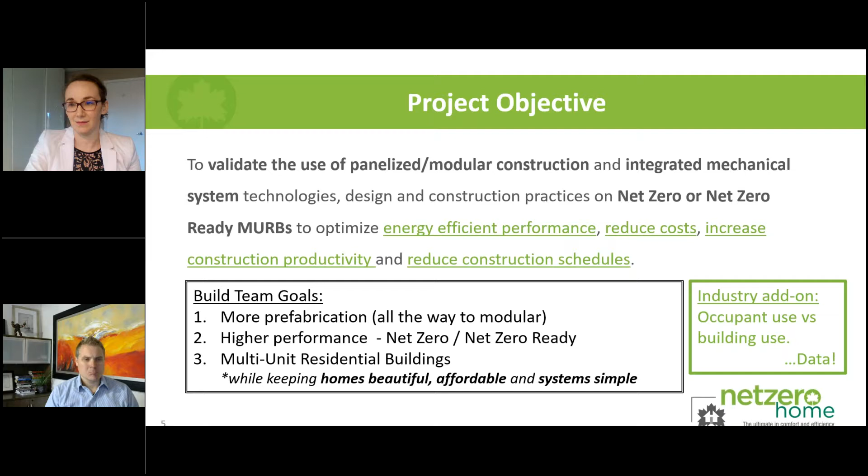So this project is across 4 provinces and 3 climate zones, and has both rental and ownership models. So we have condos and we have some purpose-built rentals, and rentals sometimes for outside organizations. There are about 100 units in total that are going to be getting energy monitoring out of this.

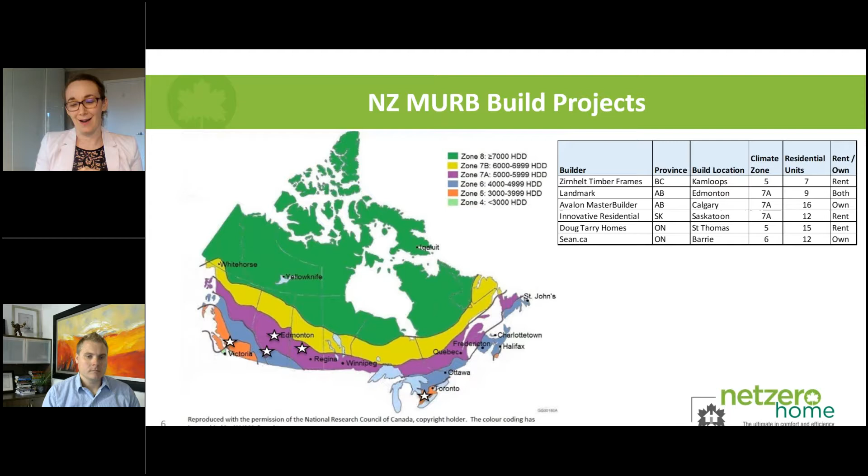Both of the net zero MURB buildings as well as some of their sister buildings. Often we're seeing builders build two of almost the exact same products side by side. One would be net zero and one would not fall under the label. We're going to get monitoring information for both to compare and have a really rich data set at the end. Also, we're seeing these builders cross from urban to suburban and rural, so it's going to be a really valuable set of information and learnings at the end.

This is a long-term project. We kicked off last year, so we're in year 2. Last year we were focusing on planning, designing, and getting the approvals. At this point, we've launched with some manufacturing and construction, so prefab manufacturing and construction on site. We're hoping to get our first units labeled later in this NRCan year, because this is an NRCan funded project.

And I'm looking forward to doing that with Alex Miller from the Big Block Construction team. Beyond that, we're going to be looking back at our lessons learned that we're collecting through all of our templates and sharing on a regular basis, and then share that information more broadly through a series of presentations and reports. We'll also have here at the end 5 years of post-project data collection on the energy performance of these units.

So we've done our designs for project builds. We've got a customized net zero MURB label that we're piloting with specific air tightness testing protocols that would recognize that attached units have different air leakage concerns from single family homes. We have our monitoring equipment and plans in place.

We've been looking at net metering and sub-metering policies and cost analysis review. So that one being the idea that if you have a single PV array for a 10-unit MURB, that is less expensive than 10 individual arrays and 10 points of connection with the utility. We're hoping to dig into this further with the 6 examples that we have, but have some regulatory policy challenges with this. We've also been working on how we're marketing net zero MURBs.

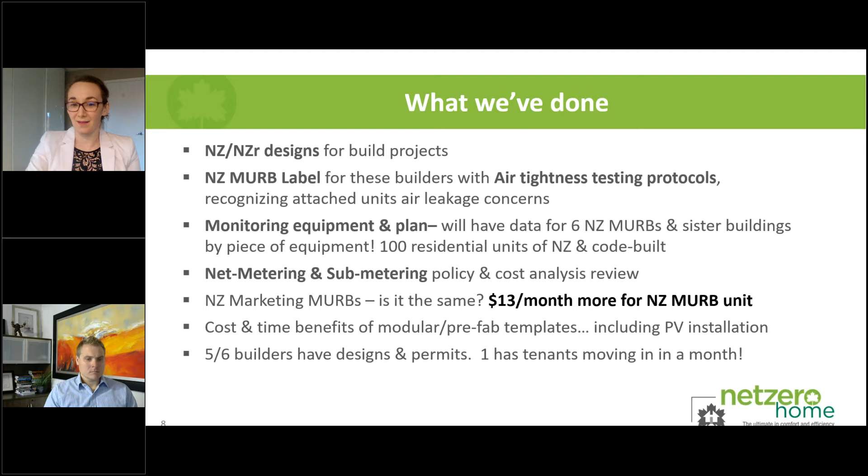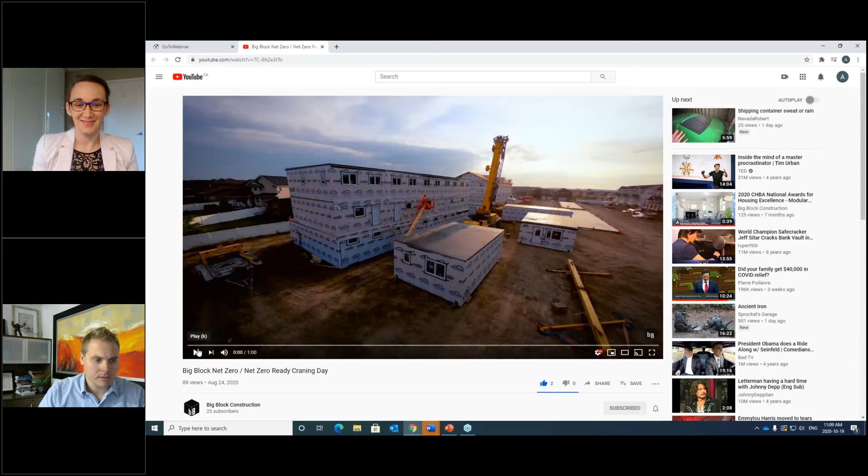Yes, we can. Okay, so this is something that we did here. This was our craning of our net zero building in the 3rd week of August. So I'll just start with this, and then I'll walk through it a bit more.

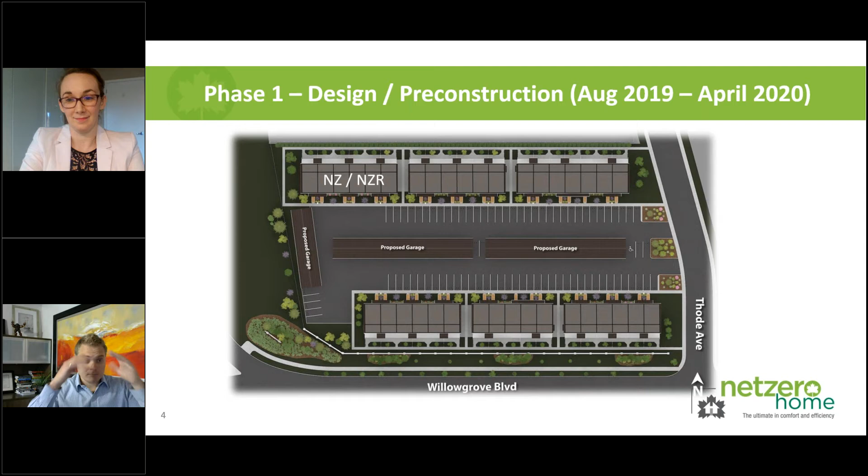As an engineer, I really love this thought process of being able to analyze multiple things with less variables changing. So real quick background on the layout: we have a 3-bedroom, 2-story on top of a 2-bedroom single-story.

In the interest of time, I won't walk through it fully, but this blue line here is kind of grade, so you have a little bit of walk up on the front and a 2-story walk out at the back.

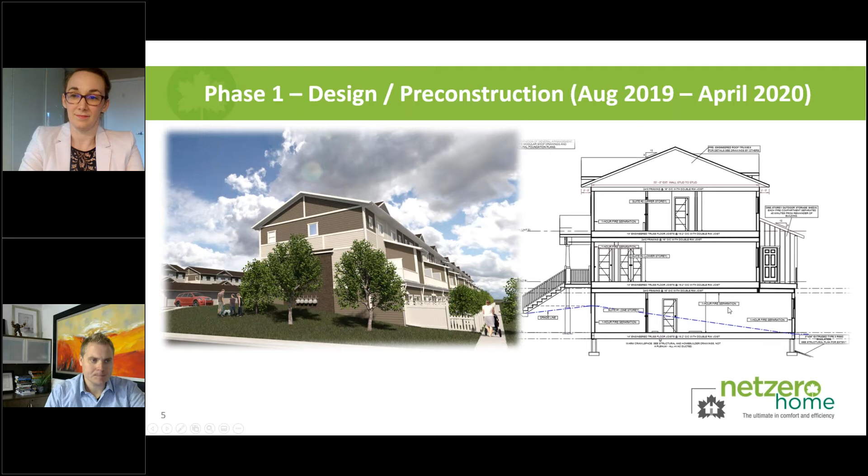So phase one, there was a ton of stuff that went through this, but in the sake of time, the design charrettes we went through and the building project analysis gave us a lot to think about.

The routine builder meetings, I can't thank enough, and if I'm committing to saying names I'll forget someone, but Sam, Chris, Haitao, Sean, Greg, Doug - I couldn't ask for a better group of builders to work with, being as open, honest, and transparent, and working towards our common challenges to get to this.

A huge thank you to CHBA for creating the environment in which we can all help each other. So super excited for that, and it's been a privilege.

So we went through a ton of different design requirements, product comparisons, and selections.

COVID happened and threw a bit of a wrench, but not a big one, because - and I could talk for an hour on why COVID didn't really throw a wrench into the modular component - that's a big kudos to Grandeur and any modular builders, for the controlled facility aspect and how it relates to COVID.

The one unfortunate part is because of COVID, we didn't get that pre-construction meeting like we wanted on site or in the factory. We still did pre-construction meetings, and I think it went really well considering. But yeah, I'm excited for us to be able to come back to that.

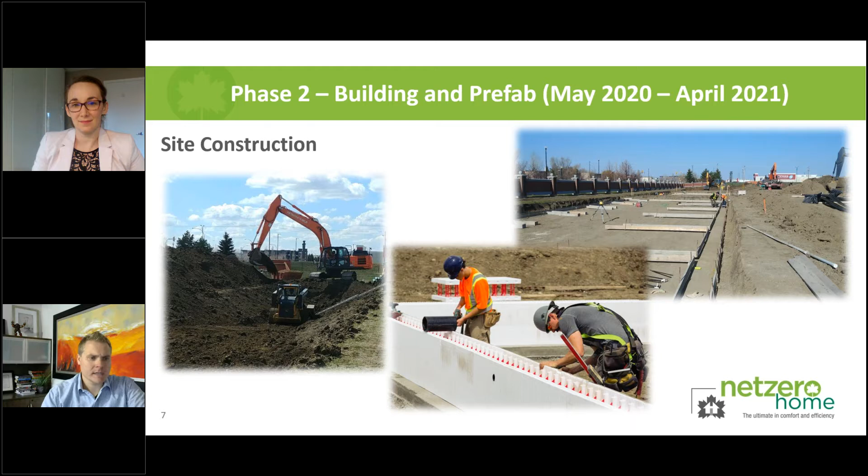A couple more site construction pictures here - sorry, these are high-res photos and now I've lost my mouse. Here we go, finishing those crawl spaces, getting them a little more ready for craning.

We did, like I talked about, a bit of building the grade up on the front of those units, as well as getting all of our utilities installed - SaskPower, Sask Energy - and any hard landscaping we could do prior to craning.

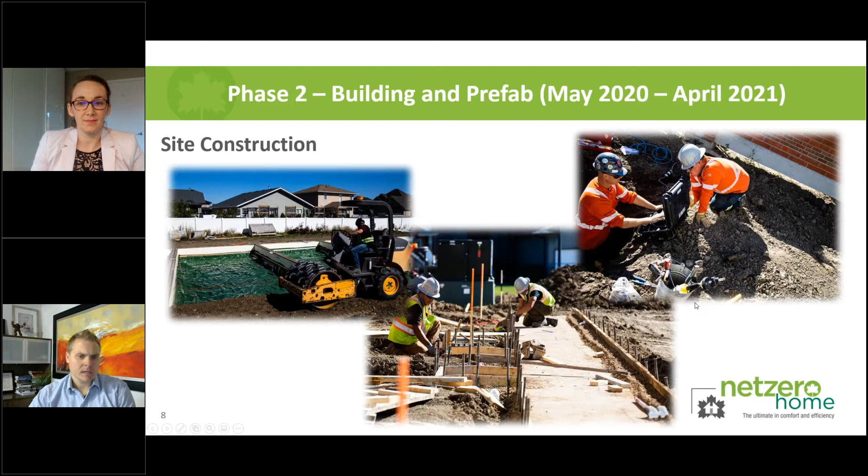And then of course, I'm really not going to do justice here for how awesome the modular component worked. We've got tons of videos, and so does Grandeur and other companies, on what it actually is, but I think you're all kind of familiar with what modular can be.

What we particularly did on this project, we actually did a 2x10 wall with a 2x6 exterior and 2x4 interior plates. That really worked well to get us the energy efficiency we needed, also from an on-site perspective of being able to finish it.

We've done full wrap EIFS systems before, but given the design and nature of this particular project, this is what we chose to go with. We've never done a double wall before, so that was new to us. The windows were Burdick manufactured.

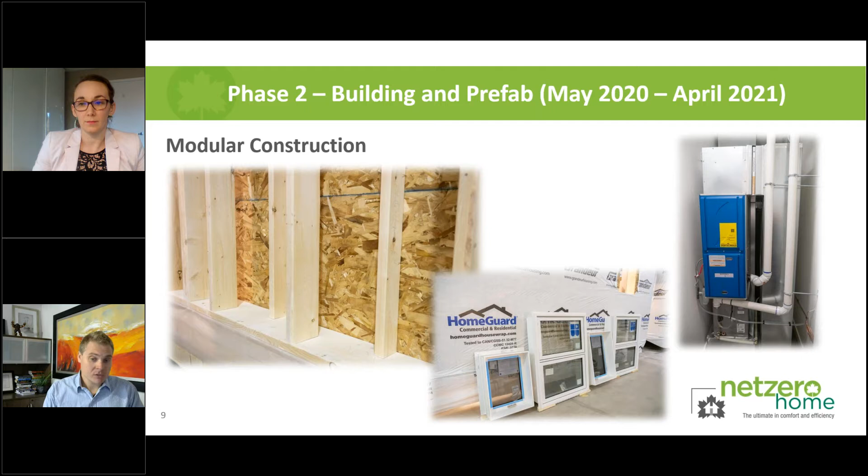They're triple pane, double low-E, argon filled, standard. That was our base, we didn't have to change anything on that. Really good windows. Something new to us was this dual furnace, natural gas, Chinook brand, but it's a dual furnace with an air source heat pump. That was new to us, going through the design and understanding how it actually works. Fascinating technology. Of course, you have your typical HRVs and ERVs.

Another thing new to us was the air source heat pump domestic hot water with backup electric heat. This was really fascinating for me as we were going through the design, understanding its place - where does electricity have its place? In our particular case, we don't have a lot of hydro in Saskatoon, in fact I think we have zero. Our costs are 5 to 1, not including maybe the carbon pricing that's come into effect over the years, so I'm really trying to understand the balance of where all these things fit.

Plus, all of our electricity actually comes from burning natural gas at our local power plant. So to think that gas doesn't have a home, I think is a little bit short-sighted. But anyway, we did end up going with no gas on this water heater - it was an air source heat pump. So that was new to us, and going through it was really interesting.

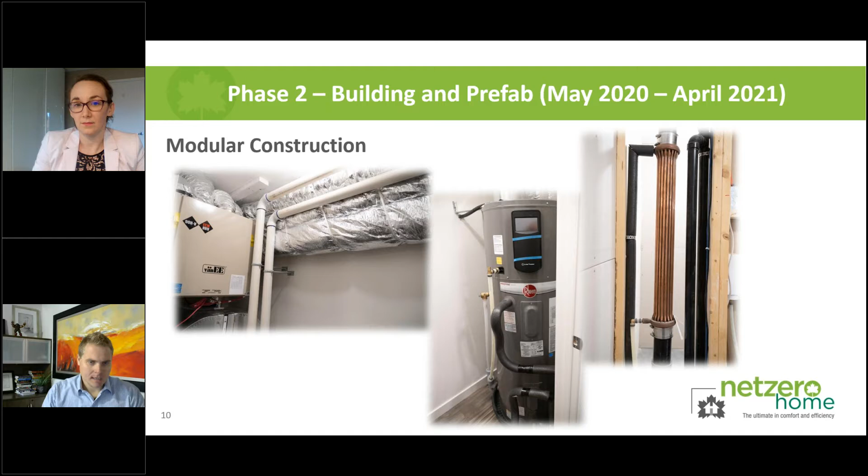As well as the drain water heat recovery, which again, we've never done. A couple finished pictures of what some of these homes look like - they're a rental base, so these were the specs. I think you guys are all familiar with what modular can look like. And then of course, some more pictures of us here on site putting it all together.

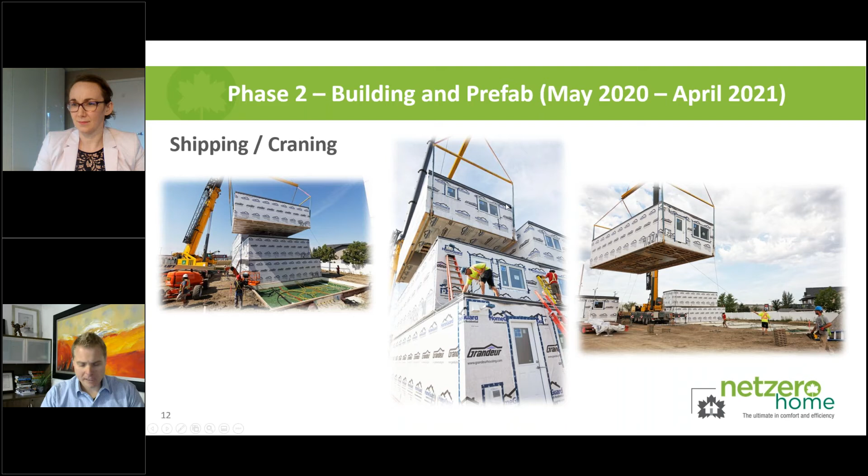Quality assurance program - I can spend a real quick minute talking about this. This is really neat actually. The Saskatchewan New Home Warranty program came out with this new value offering this year. It's a quality assurance program, and basically in Saskatchewan, from a high ratio leverage point of view, you have to have insurance, a new home warranty for the banks. But what's unfortunate is through the entire building process there is no exterior inspection requirement, which could be because of our location in Canada and the amount of rainfall and our climate.

However, that's one thing I think is really, really important - it's the first line of defense for these buildings as a whole, and it really aligns itself with net zero being as airtight as possible. You do the airtightness from an energy perspective, but you also like to do it from a quality perspective. So we were super happy to join John, the CEO of the Saskatchewan New Home Warranty, with Keith Hansen from Sunridge, group of builders. The relationship and knowledge these guys have, as well as Keith, Dave and Darcy, the entire team at Sunridge doing the energy analysis on our building, have been fantastic to work with, and a really, really cool opportunity.

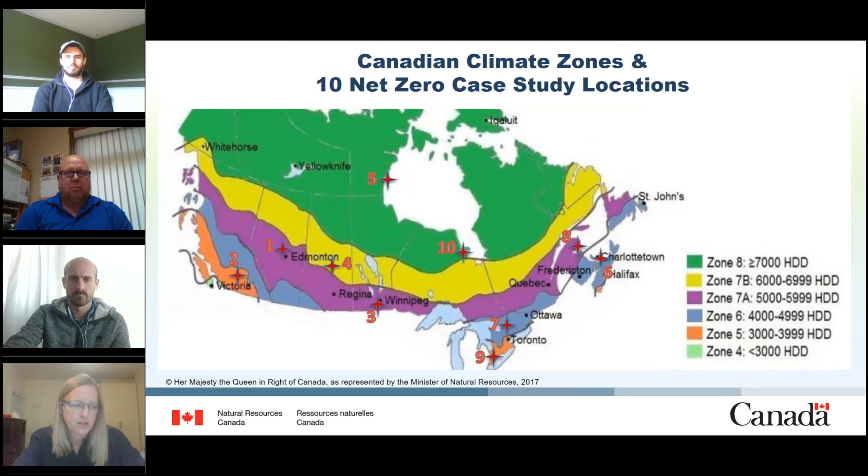So the focus story today is case study number 3. The builder is Grandeur Homes, located in Winkler, Manitoba, which is in climate zone 7A. It was a 2-bed, 2-bath, 1475 square foot bungalow, built as 1-piece modular construction with a site-built porch and attached double garage, and it has a full insulated 8-foot basement.

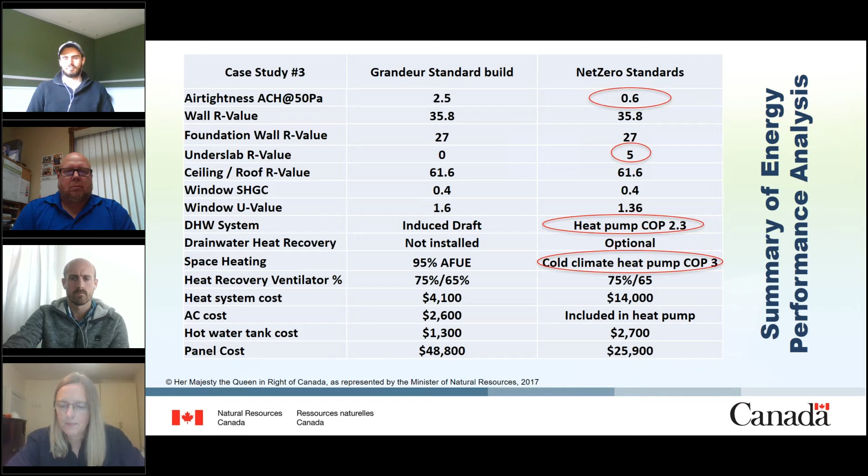This shows a very quick summary of the energy performance analysis. We began by looking at the plans for the modular home provided by the builders, then analyzed them and identified shortfalls and the best options to reach net zero performance. For this particular home, we had to look at the air tightness, add under slab insulation, and look closely at the mechanicals for opportunities for upgrade.

So a summary of the study results for case study number 3: the envelope energy performance was excellent. There really was no change needed in terms of R value, but we did discuss air vapor barriers and insulation strategies, and we shared the LEEP wall system packages, which are available to all of you who are interested.

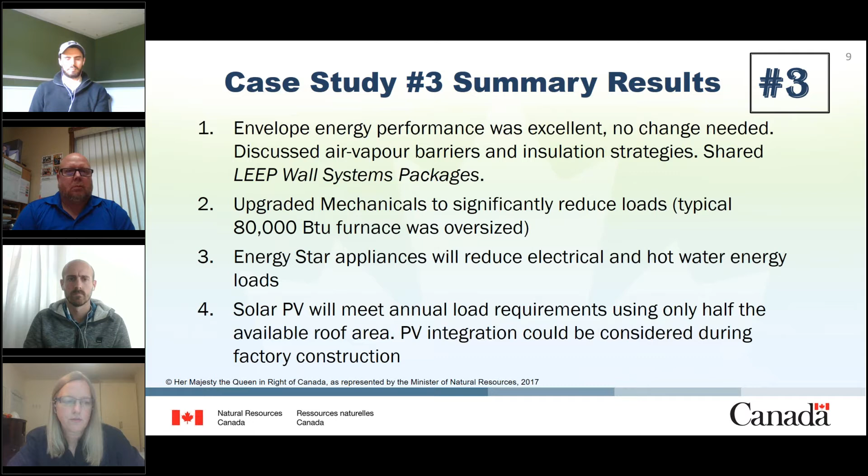We looked at the mechanicals, and a typical furnace would have been 80,000 BTU, which was oversized. We looked at the appliances and suggested switching to Energy Star appliances to reduce the loads for electrical and hot water. And of course, solar PV was available, and we only needed half of the roof area to meet the load requirements. We also discussed the possibility of PV integration in the factory construction process.

One more quick comment: Grandeur chose to participate in the Net Zero Home Labeling Program that's currently ongoing with the CHBA Net Zero Council, and this home will be labeled.

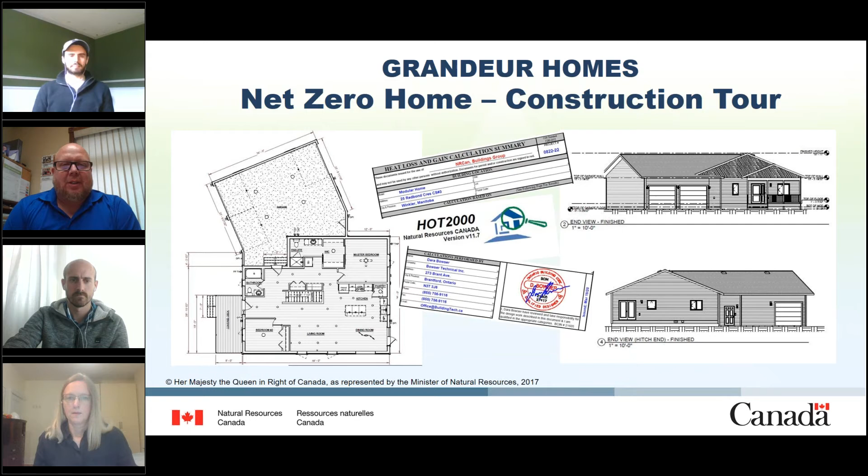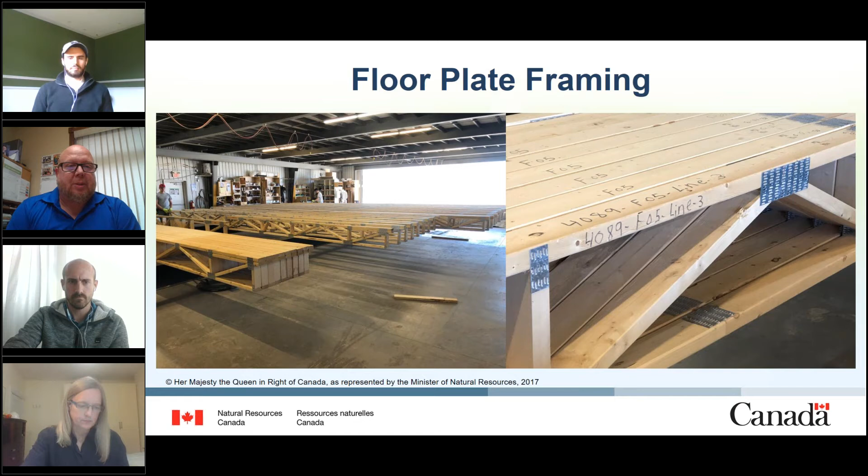Okay, so our typical building is done with our in-house built engineered open wood web joists. So starting off just as a typical home would. Next slide, please.

We get into more of the mechanicals once the floor is laid out. We spent a lot of time in the ductwork area on this home. We had the ductwork design done by Dara Bowser of Bowser Technical, and used, instead of a main trunk system, individual 8-inch round ducts that fed off to or down to 4-inch ducts as required throughout the floor. Next slide, please.

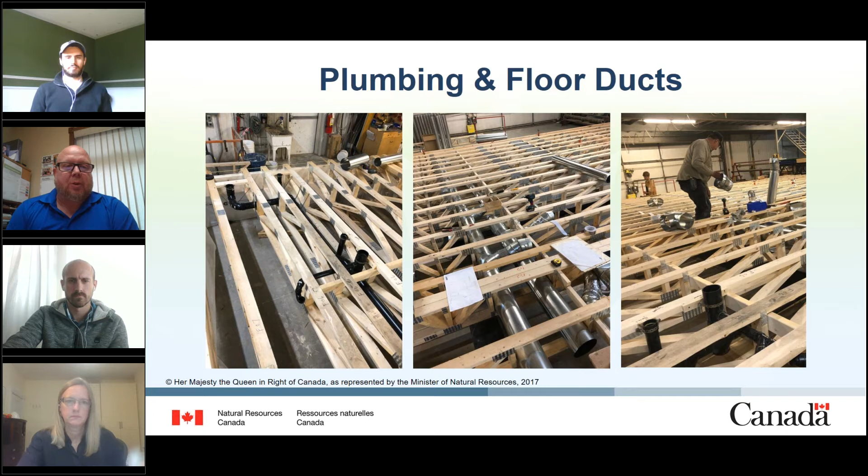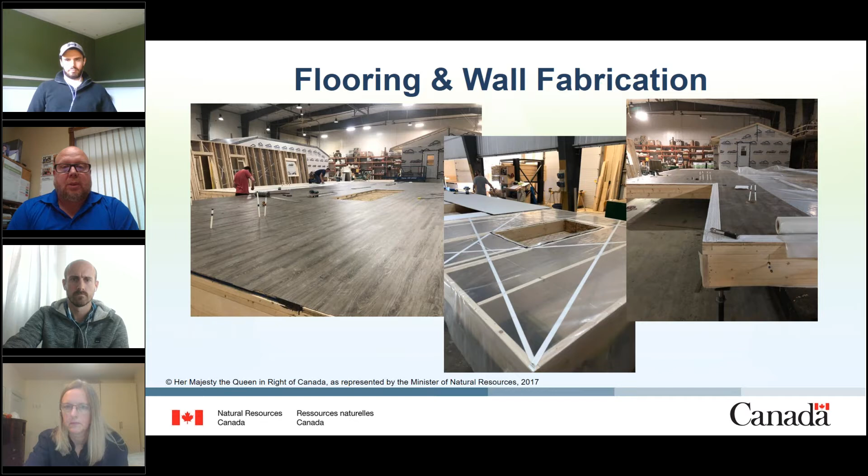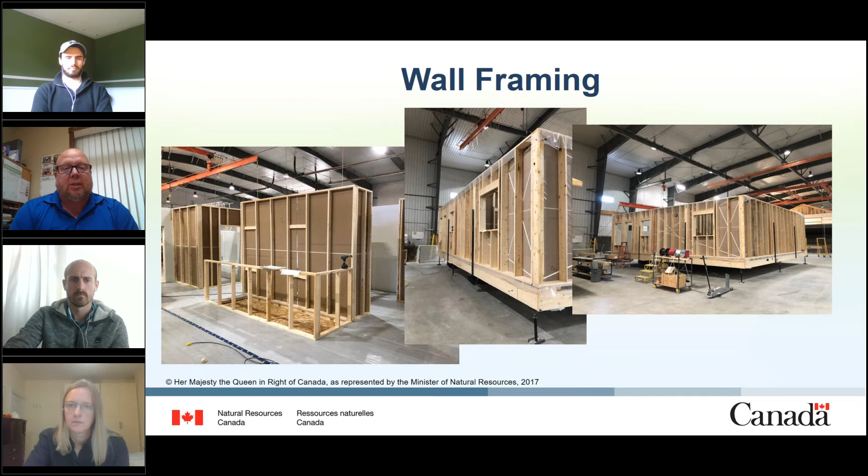And here you can see some of the wall constructions. The first one on the left is interior walls, and then the exterior walls that you can see from the outside of the building. We incorporated wall type #1 from the LEEP wall packages, which is a 2x8 wall, 2 foot on center, using advanced framing techniques of single top plate, filled with R28 batt, and then using 2-inch EPS rigid on the exterior of that after the sheathing. Next slide, please.

Here we've got the roof assembly on our mezzanine floor, where we construct all of our roofs. We lay them out down at floor level. Once the trusses are assembled, it gets lifted up, put on stands, and then we install the vapor barrier and drywall as it's on the stand, then finish it complete to texture, and have it ready to move down onto the home on the main floor.

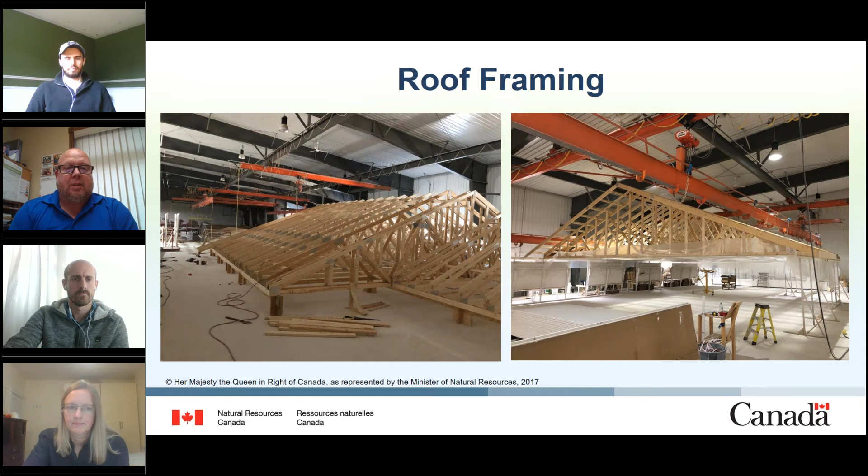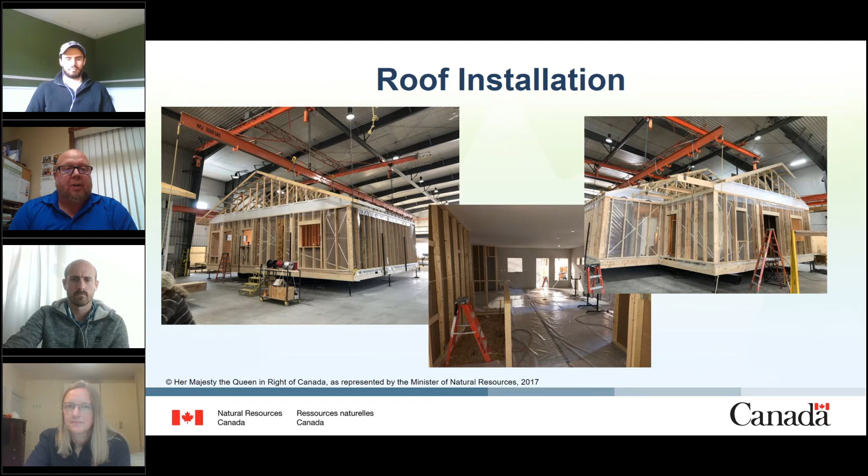Here you can see the roof coming down using our crane system. All walls are already in place, including interior walls, and then the roof is dropped down from the mezzanine floor onto the walls and fastened. At that point, we're also making sure that all our vapor barrier seals are in place and ensuring that we're good to go for air leakage.

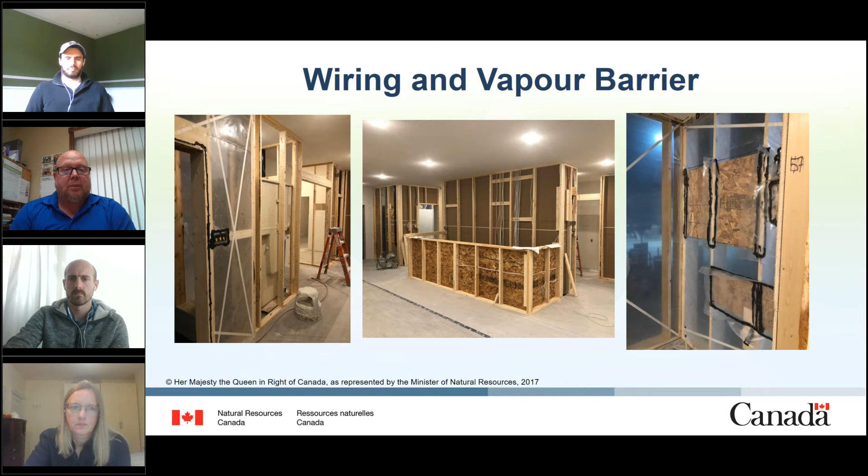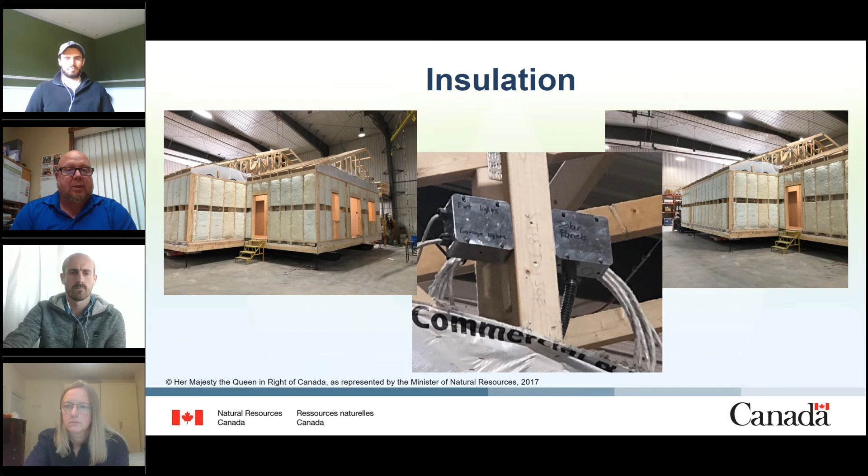The insulation, here you can see being installed, R28 batt, as I had mentioned earlier. Knowing ahead of time that we were going to go full net zero on this house, we planned ahead knowing that we needed to run a wire from the solar array down to the panel. So we installed a junction box and the wire required for the array so that it's a quick hookup on site.

Window ratings, again we're using Burdick windows, and we did do a slight upgrade on the Energy Star rating on these windows, also using a very good low expansion, closed cell foam for sealing them up.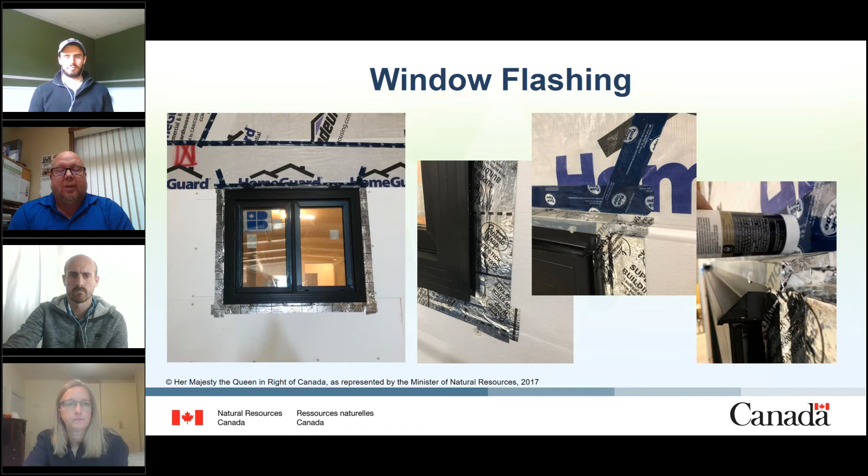So here you can see the next step in flashing the window. Once the window was installed, the next layer of flashing tape was installed, the drip caps with end dams also all tying back in, behind the house wrap.

Site work was typical. Dug the basement, had the footing installed, and used the ICF forms, and everything went extremely well there.

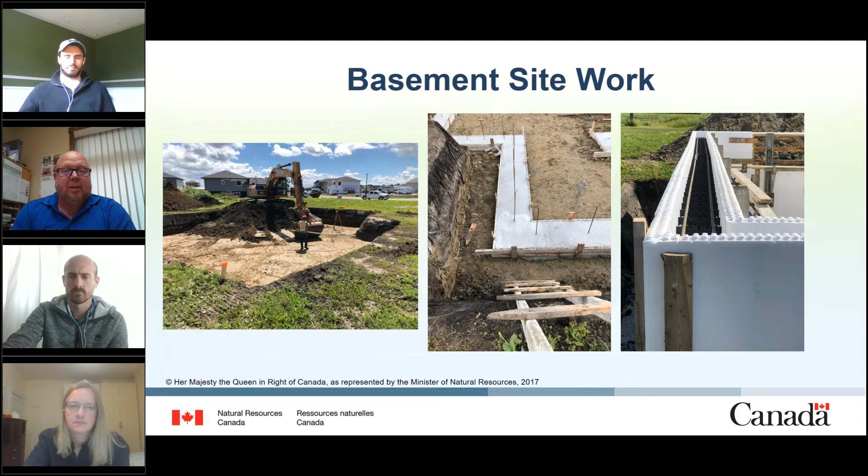And moving day. We got to move the house onto the foundation. Everything went smooth there as well. And as you can see in the picture on the right, the boss and I are very happy.

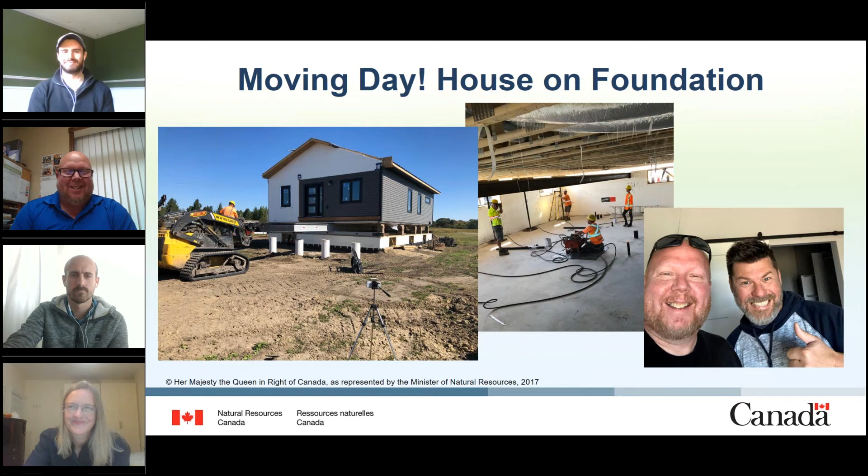Front deck work. The site work started almost immediately, and we got the deck on right away.

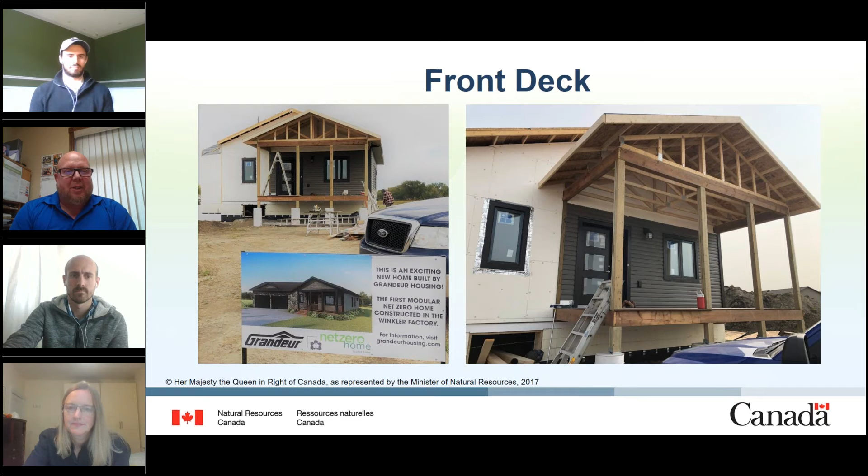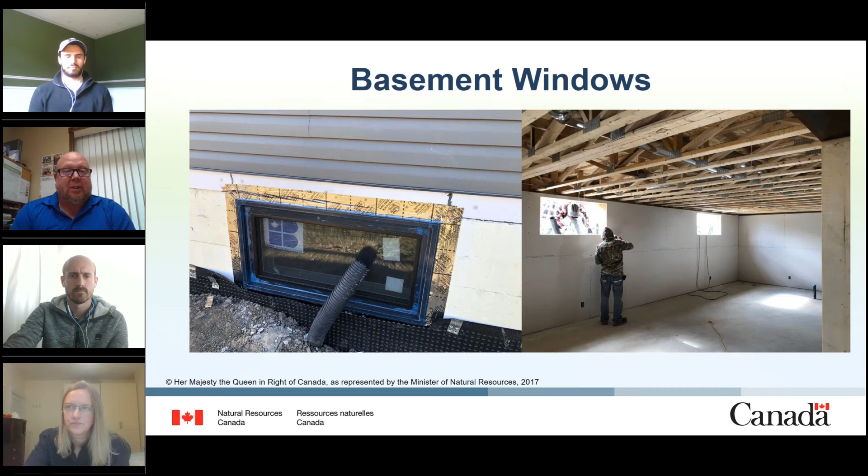Basement windows, the same attention to detail was done on the basement windows as what was done on the main floor windows, just making sure that our flashing was positive and sealed up 100%.

Garage foundation, once the house was moved on, we could start with our garage foundation. We needed to wait with that because that's exactly where the moving truck was going to be coming in. Otherwise, we could have worked ahead a little bit on that one and had the garage already there, but once it was there, we got going on it, and it worked well as well.

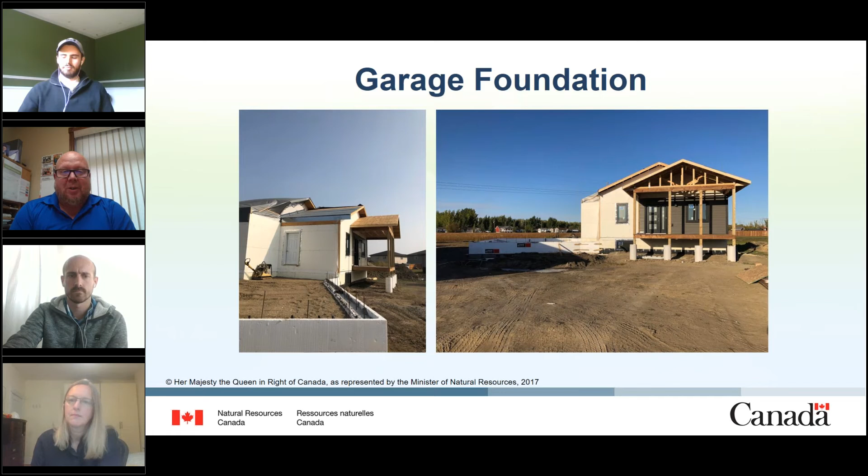There we go. Garage trusses in place, everything moving right along. Next slide, please.

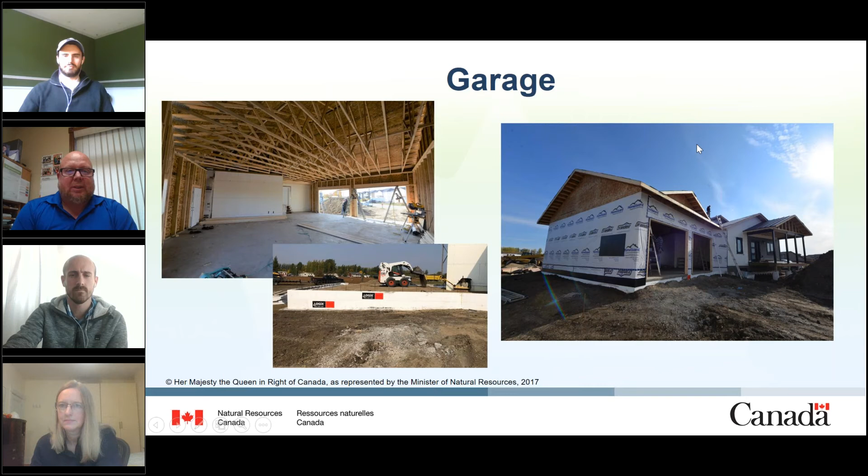Okay, mechanicals and solar PV. The house is being heated and cooled with a heat pump system, air-to-air heat pump, and the hot water is also an air-to-water heat pump, similar to exactly what Alex is using in his MURB project. We're also using the drain water heat recovery system, and a high efficiency HRV for ventilation. The solar panels are a 26 panel array on the southeast side of the roof, producing 12 kilowatt hours of power.

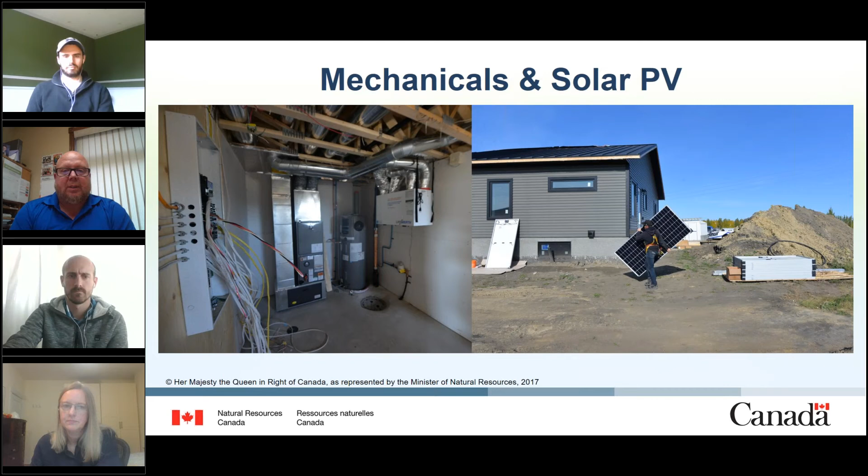Next slide, please. Interior finishes are Grandeur's typical offerings. Very, very beautiful looking house. And that's the end of my walkthrough.

Jeremy, are you up next? Yes, I'm up next. So can you go to the next slide, please?

So for the mechanical system, one of the first things we wanted to do is include a mechanical designer on the team so we could consider the different aspects of the mechanical design. The first thing the mechanical designer did, with the plans, was do an F280 calculation, knowing the heat loss and heat gain on the home. In this particular case, we're looking at just under 24,000 BTU per hour. As Clarice was mentioning, your regular contractor would have come in and said you need an 80,000 BTU furnace in here, so it's pretty critical to get that mechanical design done for the home.

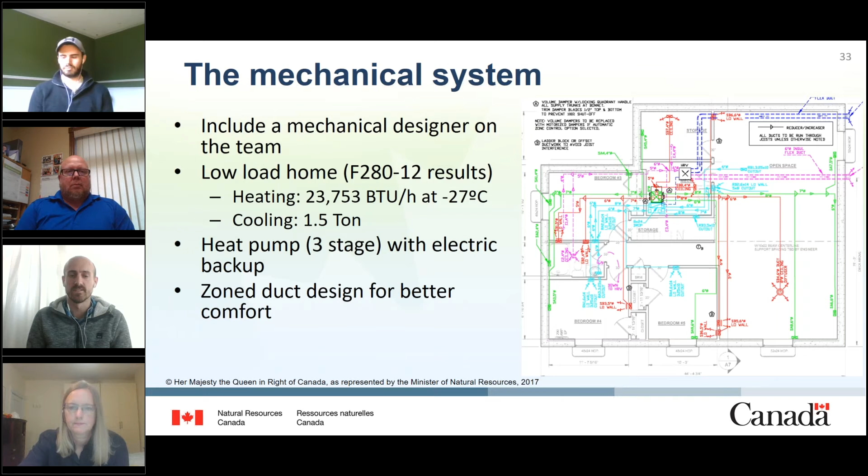Second thing we were looking at is what kind of equipment we were going to install. In this case, a heat pump was selected, a 3-stage heat pump with electric backup heat. The duct design was particular in that the basement and main floor are separated, so it's a zone-ready system that will allow for later adjustments to get better comfort for winter and summer conditions. Next slide.

In terms of next steps for this one, we'll be testing and monitoring the system. We'll be looking at airflow measurements for the zone ductwork, doing a room-by-room flow measurement to confirm design airflows. We'll also be monitoring the heat pump over at least one winter season to see how it's performing, and that'll be used for some standard developments. With that said, I'll pass it over to Lucas.

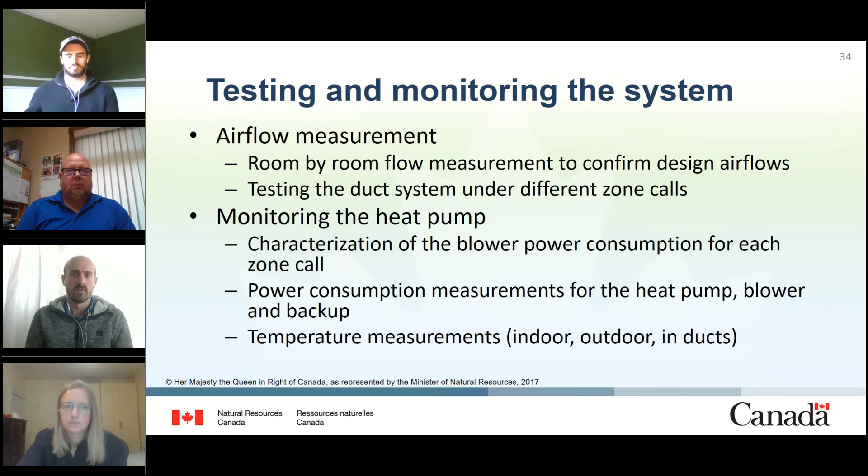Thanks, Jeremy. I'll keep this really quick in the interest of time. We have a chance to ask these interesting presenters more about their project, but some of you may remember a presentation given last year at the Modular Council about a tool NRCan is developing called CBAT. CBAT is a cost-benefit analysis tool that allows builders, energy advisors, and everyone in the home building industry to better assess the cost of building to certain levels of energy performance.

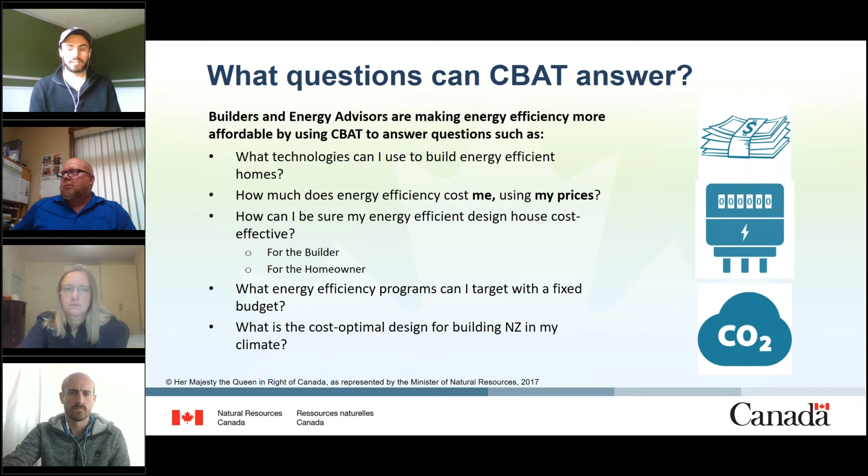CBAT is designed to answer multiple questions that many of us have as we're moving from code to something slightly more progressive, like what technologies are available to get to energy efficient designs. Equally important is how much that energy efficiency design costs, using your own prices. CBAT allows you to go into the tool, customize costs, and view different types of optimization criteria to help you better understand what decision is most impactful and beneficial for your business and the homeowners after the project is completed.

Next slide, please. We were lucky enough with this specific project from Grandeur Homes to use their case study 3 archetype as one incorporated into CBAT. Now users who pick up the program will notice the Grandeur modular archetype in there, run across 10 cities and all climate zones for the country. We've taken 90,000 HOT2000 runs across all the cities and climate zones, so you can have better access to understanding how to move a home similar to that specific Grandeur home to various levels of energy performance.

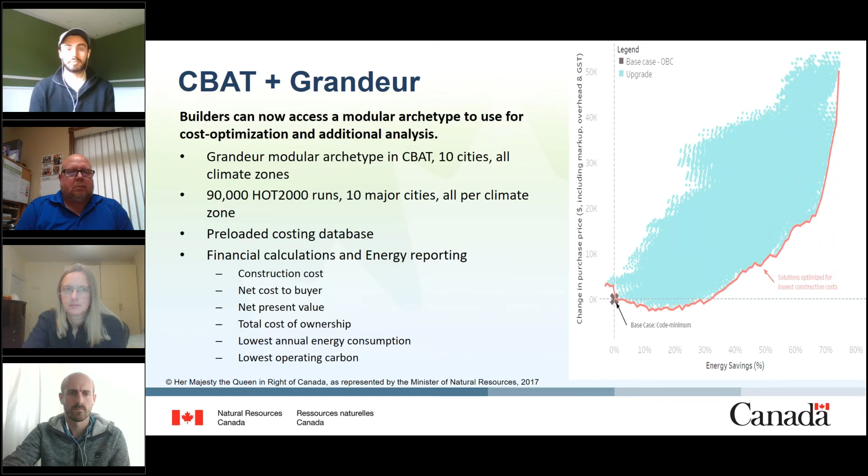You can also access the preloaded costing database within the tool and gain insights into different analyses like construction costs, net present value, cost of ownership, and lowest annual energy consumption. If you have any questions regarding the tool or its upcoming release, feel free to direct them to Clarice after this presentation. Thank you very much.